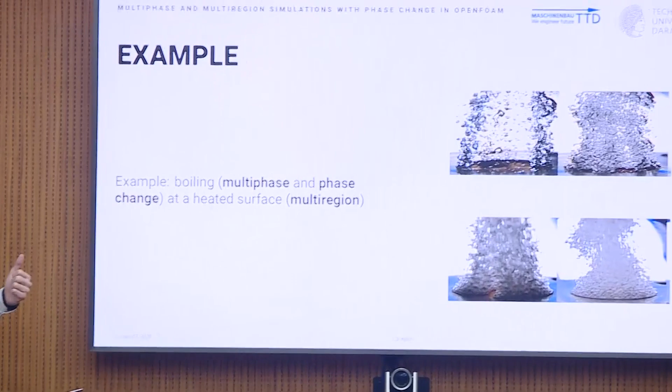You've seen it all. The boiling process is the perfect example: it's multi-phase, vapor, multi-region, solid and the fluid above, and we have the phase change between liquid and vapor. And the challenge is, of course, how to model it.

I am not in the position to give a general overview of all methods. I will rather try to give you an overview based on my PhD work in the last 4 years, which is close to this experiment which has just been presented. I will try, as I said, to locate the methods among the possibilities, and hope that you can see some universal methodologies.

If you are looking for general overviews, there are excellent textbooks and very good reviews. A textbook example is from Grétar Tryggvason, who was here 2 weeks ago. And there is a company, I don't know them, but they put out high quality presentations on their website on OpenFOAM.

So feel free to check them out for a deeper and more comprehensive overview.

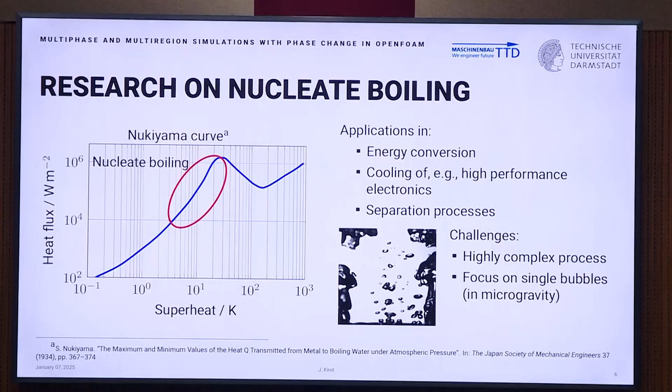That's the reason why we do experiments and numerical simulations in zero or microgravity. And then there is the interplay between the experiment and me as the numerical guy.

Axel said they challenge me, they challenge the numerical methods. I try to be strong, and in return, I can use the simulations as a magnifying glass and investigate phenomena which are not visible by experimental methods. And of course, I can do parametric studies without flying to the ISS. So the interplay between experimental work and numerical work is very important.

Okay, let's pretend we start from zero and have to choose what kind of models to choose. Each of these three categories has different tasks.

So multiphase needs to tell us where the interface is. We reconstruct it so that we know the shape of our bubbles or droplets which we are simulating, and it has to advect this interface in our simulation. How does it move with the velocity or phase change?

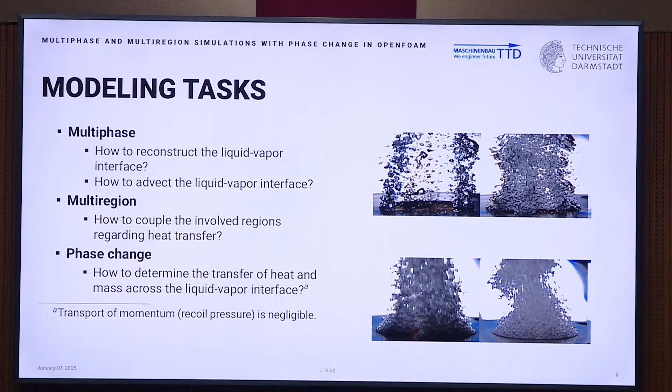Multi-region, in our cases, we don't have large forces and no mass transfer, so multi-region reduces to conjugate heat transfer between the solid and fluid. And finally, phase change: how do we calculate evaporation and condensation?

I want to stress that multiphase, multi-region, phase change sits in a bigger picture, of course. We are inside CFD simulations. Above today's talk, there are choices to make, like whether to use the lattice Boltzmann method, or how about turbulence, even discretization schemes. And below today's level is the stuff Professor Stephan has presented: what do we do really close to the contact line? So we are in the middle of the pattern.

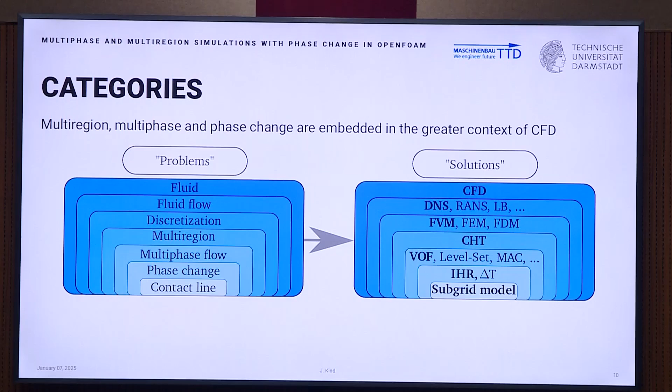A Lagrangian approach produces either a moving mesh, which deforms with the interface, or the front tracking method, which introduces small massless particles. These particles are moved, they experience force from the flow, and they tell us where the interface is.

In contrast, in the Eulerian approach, people introduce scalar quantities, and these scalar quantities are transported through the domain. To my knowledge, in my field of research, simulation of bubble growth, it is rather uncommon to have Lagrangian type; many people use the Eulerian type interface.

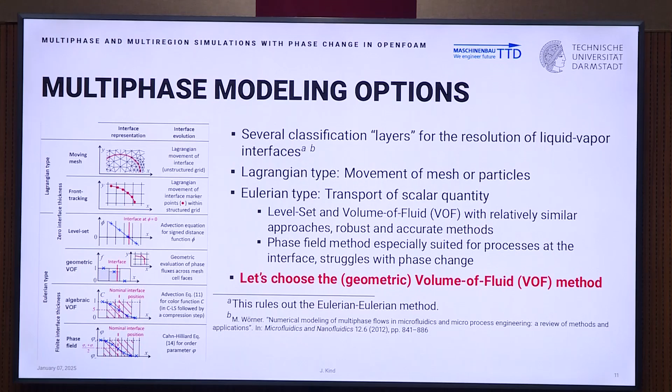Starting with the phase field method, I had a discussion with Arvind. It's very well suited for interface chemistry and has nice surface tension implementations, but it has problems with phase change.

In contrast, the level set and volume of fluid methods are more used for phase change phenomena and are relatively similar. We had the talk of Professor Sharma yesterday, who showed us this level set function. The volume of fluid method is slightly different, and he mentioned that the level set function always has the problem with mass - you have to ensure mass is not getting lost. The volume of fluid method doesn't have that problem. I'll show why in a second.

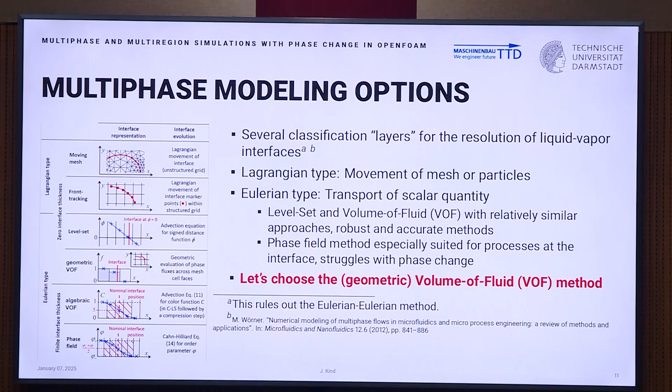Therefore, let's choose the volume of fluid method for further simulation, and in particular, let's choose the geometric VOF method. I will explain the difference between algebraic and geometric VOF.

Multi-region modeling, or conjugate heat transfer, always is based on the Dirichlet boundary condition for temperature equality at the region, at the patch where both regions meet, and heat flux equality - this is the Neumann condition.

However, if you want to implement these two conditions in your simulation, you have lots of options. Usually people use Dirichlet in the fluid, Neumann in the solid, or vice versa, or Robin Neumann - really lots of different combinations.

To my knowledge, the most advanced coupling method is the Robin type of boundary condition. Therefore, we choose it, and I will explain it.

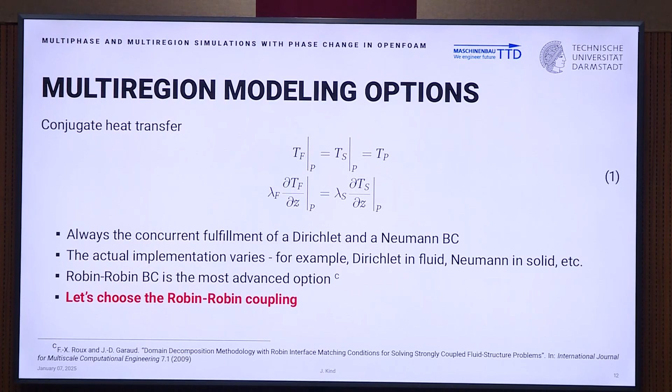Finally, phase change modeling. There are two approaches to phase change modeling. Either we sit on the interface and look at the interface normal vector and try to calculate the temperature gradient towards the interface. From this gradient, we get the heat flux, and this heat flux we assume is the phase change flux crossing the interface.

This method is very robust and relatively parameter-free. So it's really a good method.

The other approach is assigning the interface a heat resistance. Then you only need the temperature in each interface cell, compare it to the saturation temperature, and divide it by the heat resistance to get your heat flux. This method is okay, robust, but everyone who has ever used it will know there is one factor in it which is free from 0 to 1, and it's your task to determine this factor.

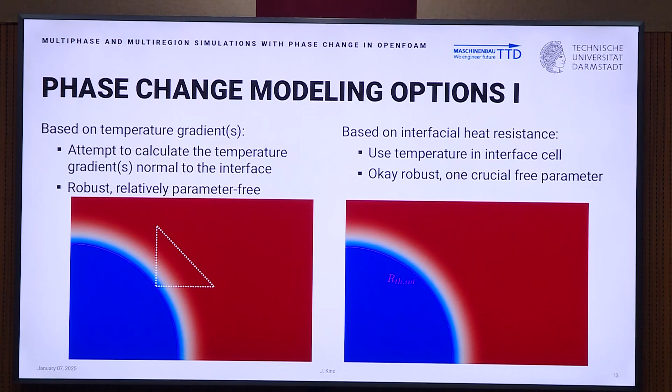So based on this information, we should choose the gradient-based models because they are, for this configuration, superior. This changes the closer we get to a region boundary, the closer we get to the solid.

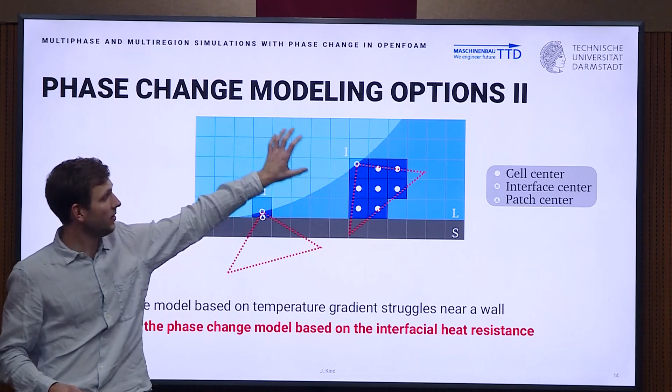So case 1, for example, for a vapor bubble in a liquid, we are sitting on the interface looking for other values, and there are enough values for calculation, so there is an accurate calculation of the temperature gradient.

The closer we get to the contact line, the less values are present for the gradient calculation - only this patch value, and this patch value doesn't reflect how much heat is transferred in this region. This is a problem because we've heard a significant share of heat transfer occurs in this region during vapor bubble growth, boiling.

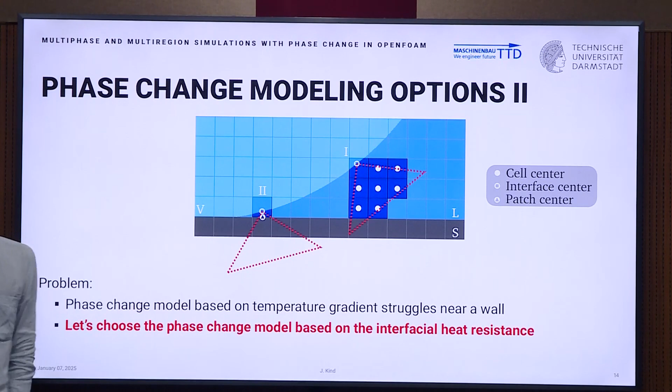And when I did developments on conjugate heat transfer in this region, I noticed that even though I enhance the coupling properties and bring more heat flux, nothing changes, because this gradient-based model doesn't pick up how much heat is in this region.

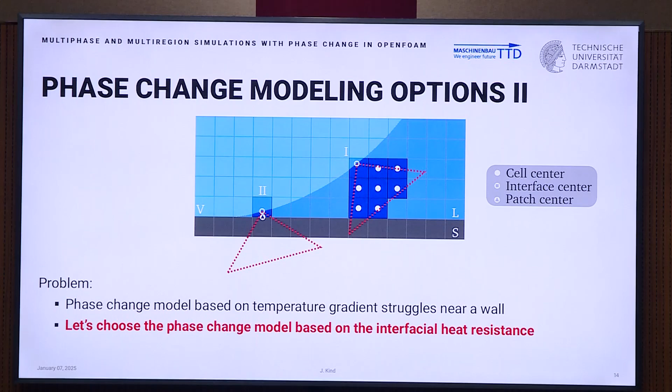And therefore, with one crying eye, because it's not the best method, we choose the method based on the interfacial heat resistance.

The volume of fluid method, which we have chosen, is based on the finite volume method at the upper level, and it introduces a variable called volume fraction. This volume fraction compares how much liquid is in a cell compared to its cell volume.

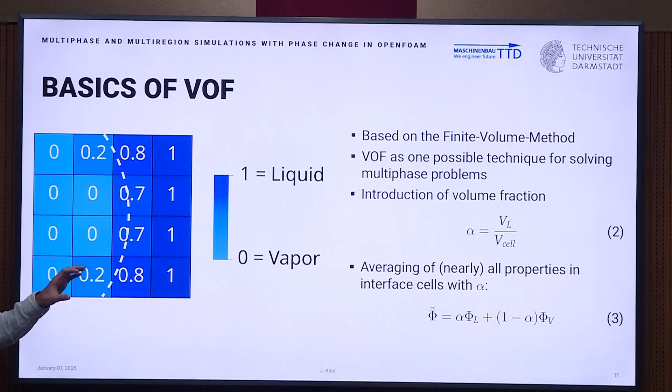For example, the model has an arbitrary interface, the dashed white line. The cell would have different fractions of liquid, one meaning full liquid and 0 meaning vapor. The advantage is that all liquid and vapor properties in these interface cells are now averaged with this volume fraction, and then we can still use the one-field formulation from single phase.

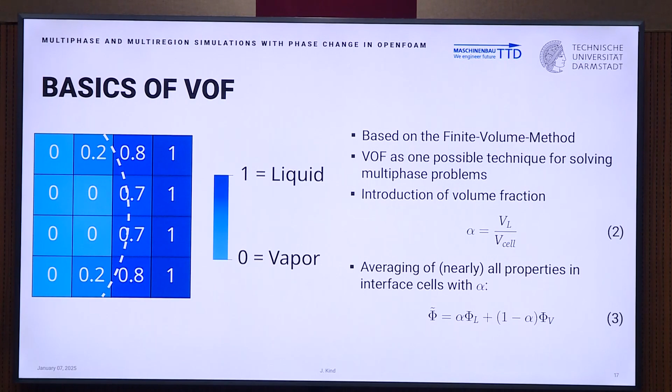And as I've already said, we need to construct the interface, which gives us the interface normal vector, very important for surface tension and contact angle modeling, and surface area, which I need to calculate the phase change heat flux arising from phase change, and advection due to velocity or phase change.

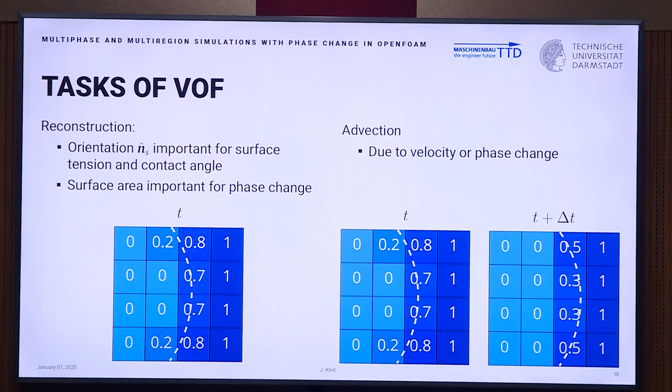For the reconstruction, there are two approaches. The first one is using iso-surfaces of the volume fraction. It's either common to use 0.5 as an iso value, or more advanced, use a variable value for this iso value.

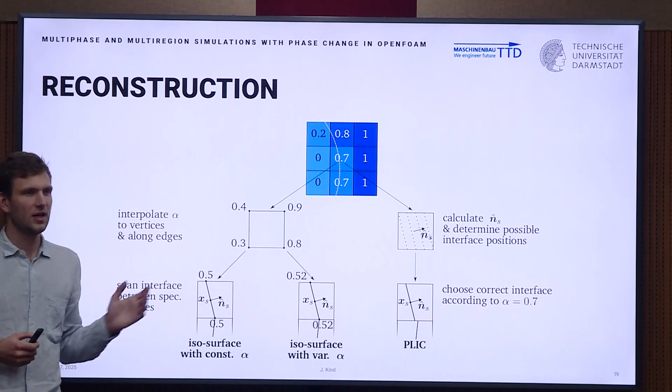And the alternative is piecewise linear interface construction, where it's an iterative process, but highly simplified. We determine the interface vector n, and from this vector we know all possible interface alignments in our set, and then based on the alpha value, based on the volume fraction, we choose the correct one.

And here is a comparison between the methods. Let me start with the right-hand side. This compares the error over the resolution of the mesh. A good method has a strong convergence with finer resolution, because the finer you go, the better it should be. And second order means it goes with the square of the cell size.

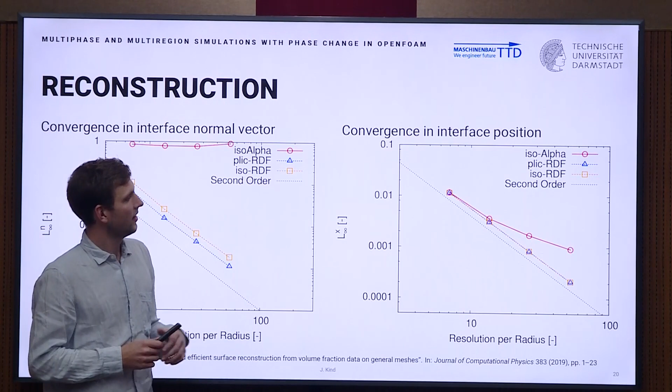And we see that iso-alpha, which is the approach based on the iso-surface, deviates from the straight line, and it doesn't even converge, which tells us this is not a very good method. There are two other methods, both PLIC-based or iso-based, and they have an RDF in the back, which I will explain in a second. We see that they are much better, with a small difference in the normal vector interface, so we state that the PLIC-RDF method is the most accurate one right now.

But what is this RDF? Usually, the interface normal vector is calculated based on the gradients of the volume fraction.

But with today's volume fraction methods, especially for the advection which is coming in a second, we see we have a very sharp transition from alpha 1 to alpha 0, just one cell, which means the gradient of this field is not so reliable. The approach is the introduction of a signed distance function, very similar to the level set function, and this function is distributed in a much wider range around the interface. So if we take the gradient of this function, the gradient calculation is much more reliable.

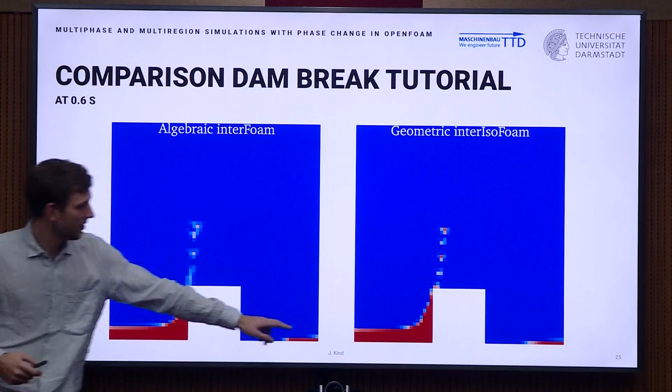For the demonstration of this higher accuracy, this is the dam break tutorial, which we've also seen yesterday. We have a liquid in gravity which is initially shaped, with an obstacle in the middle, and if we run the simulation, the liquid will fall and splash over this obstacle. I hope you can see that in the geometric VOF method we have a much sharper interface, for example also around here. Here we have a diffuse interface over several cells; here we just have one interface. So this is just a graphic demonstration of the superiority of the geometric VOF method.

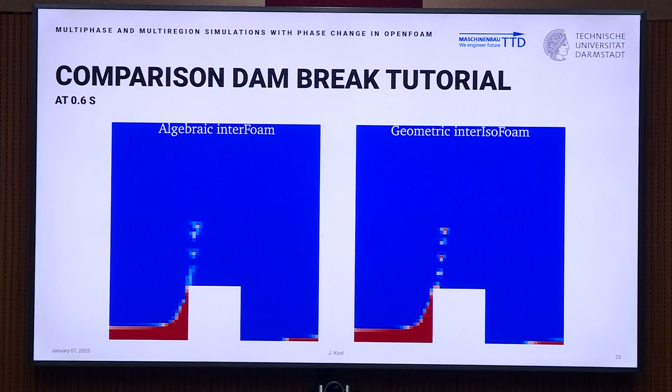Surface tension modeling we do with the continuum surface force method. It's arguably not the best and most advanced one, but it is reliable and has been used in lots of studies. You see now the importance of the interface normal vector, because we need a gradient of it for the calculation of the curvature.

Taking the gradient of a field which is inaccurate brings more error than taking the gradient of a field which is more accurate. This is a topic not so well researched and documented.

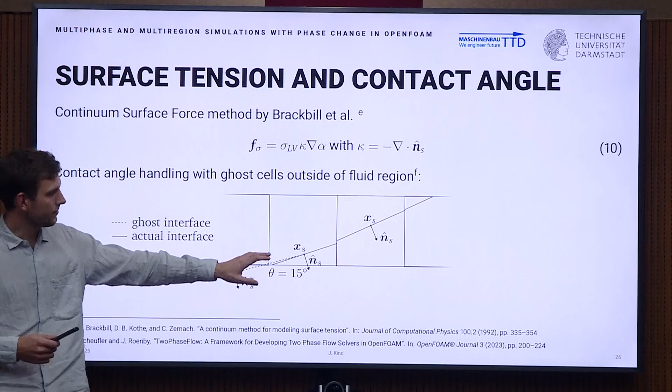How do we model the contact angles at the wall? Some people set the interface normal vector in the contact line cell with brute force to the prescribed contact angle. It works, but who knows how physical it is.

This approach from Scheufler uses values outside of the region, and this introduces a gradient in the interface normal vector. If the interface does not align with the prescribed contact angle, you get a gradient in the interface normal vector, then curvature, then the surface tension force, and this pushes the interface into the right direction. But there's still work to do, and if you're interested in numerical work, I think this is a good topic.

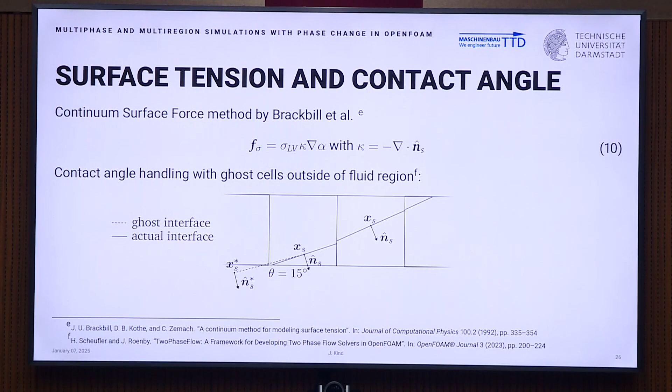For the final measure, we started with one equation for temperature or energy, and we split this into the liquid and the vapor temperature. This has several positive effects: we completely decouple both liquid and vapor temperature, and they may only talk to each other if we allow it. There's no unphysical heat diffusion, and therefore we also have more control of phase change and conjugate heat transfer, and there is higher stability.

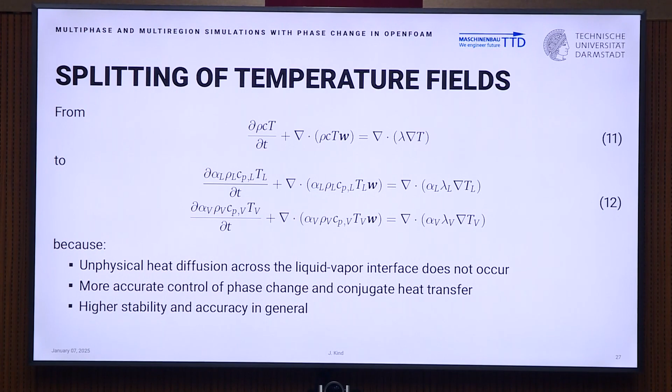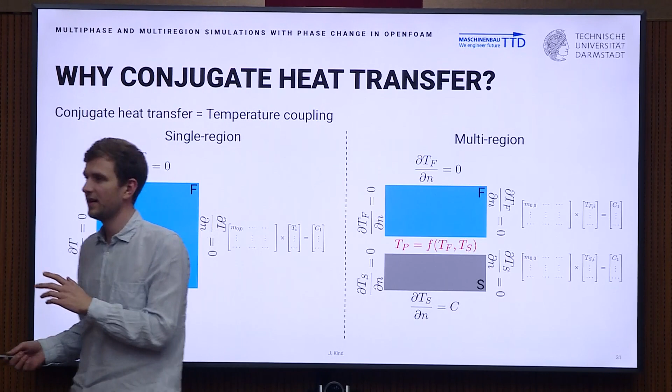Coming to multi-region modeling, why do we need it at all? In multi-region problems, we have separate equation systems for our regions, so a separate equation system for fluid and solid. At the outer boundaries of these regions we have our usual boundary conditions, fixed value or whatever you like. At the coupled patch between two regions, the boundary condition has to depend on both regions. This is what conjugate heat transfer does.

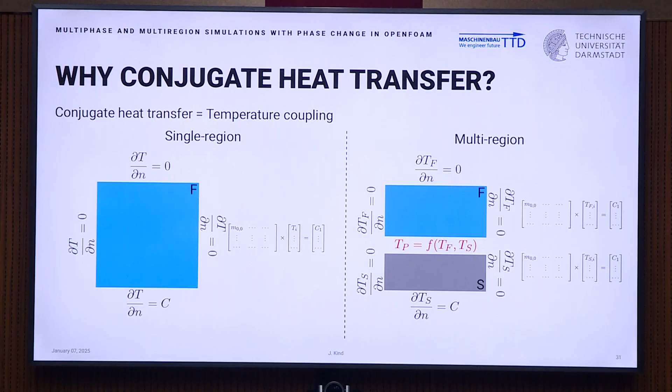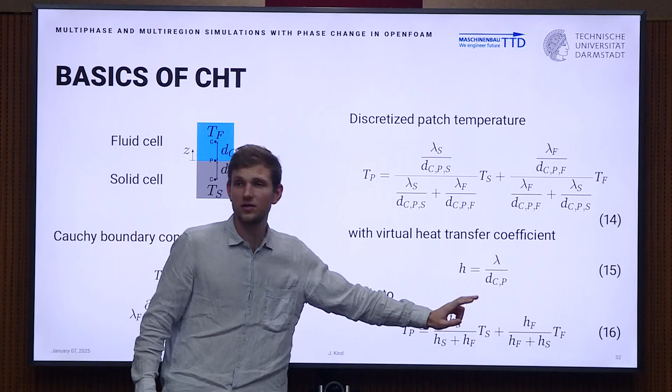Here's the equation you've seen already: temperature equality, heat flux equality. If we discretize this equation and introduce a virtual heat transfer coefficient, we end up at this relatively simple equation. So the patch temperature, the boundary condition for both regions, is somehow a weighted average between solid and fluid temperature, and the weighting is given by these virtual heat transfer coefficients.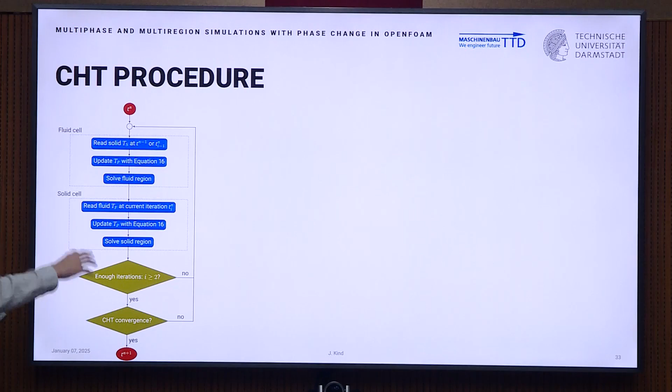Same with the solid region: we ask the fluid what its temperature is, calculate the boundary condition, then solve it. As I said, this fluid solution is based on an old value of the solid, so it makes sense to repeat this process at least once before we begin checking for convergence in temperature between the regions.

Now a short intro to the topic Axel has already introduced.

When I started working with conjugate heat transfer and understanding the equations behind it, I noticed that this usual averaging of properties in the interface cells at the wall is not correct for most cases, especially for my bubble growth case.

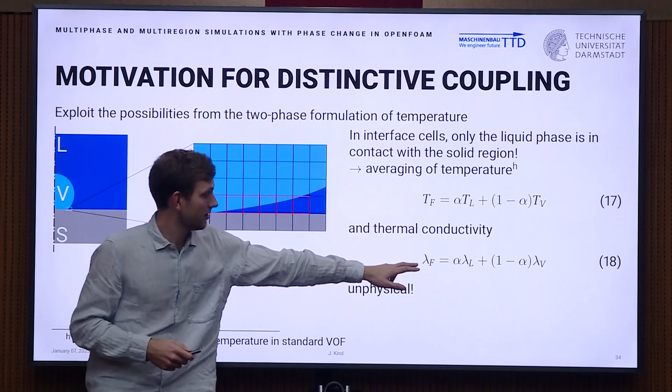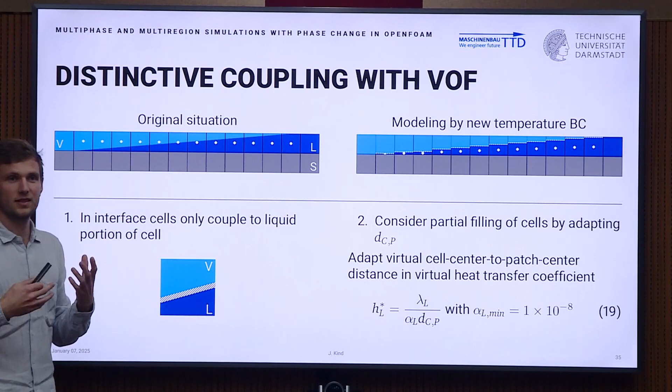Why should the vapor take part in the coupling? It doesn't touch the solid, only the liquid in contact, except for the contact line maybe, but that's another story. So this averaging of properties, especially thermal conductivity, which brings down the effective thermal conductivity in these cells, is unphysical. What we need to do is exclude the vapor from the coupling in these interface cells. With the volume fraction, we have the information on how much liquid is in each interface cell.

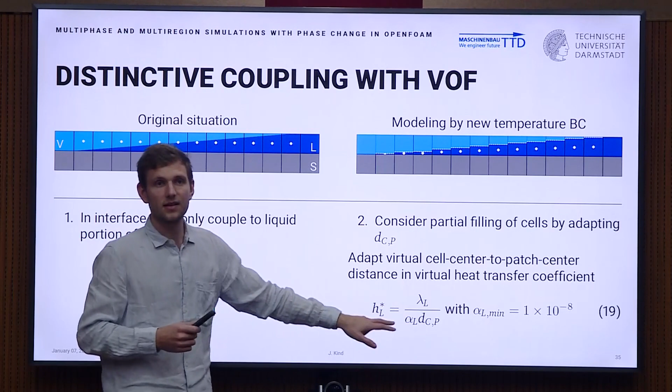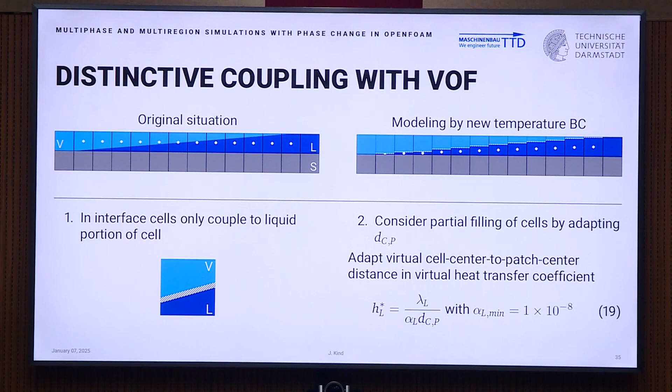With this information, we adapt the virtual heat transfer coefficient, which brings physicality into it, because we now really couple the solid cell with the portion of liquid which is the problem.

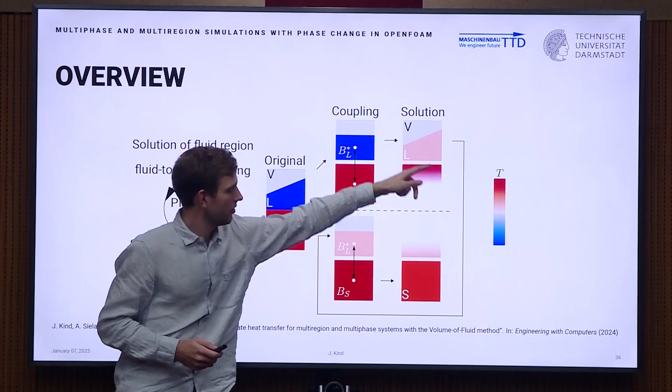This is an exemplary scheme. As I've said, we only couple liquid and solid, solve it, go to the solid, couple both, solve the solid, and repeat this process until convergence.

On the one hand, this introduction of the volume fraction in the denominator massively enhances the virtual heat transfer coefficient for small volume fractions. That enhancement is roughly 1 over alpha. But, as always in CFD and science, there is no free lunch.

This massive enhancement leads to a tightened stability criterion. I will introduce this stability criterion in the second part today, again with alpha squared. So you have to be careful, you don't get it for free.

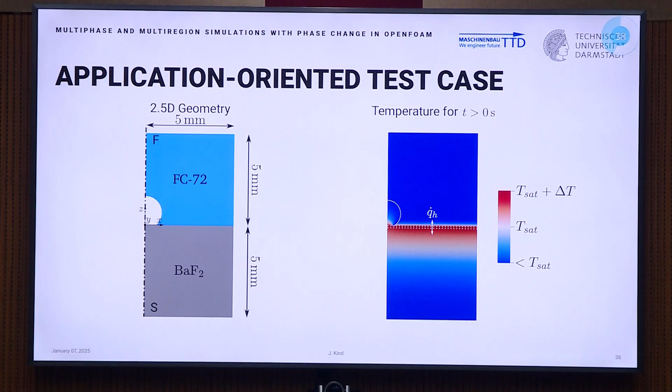We have countermeasures against it which work really well. I won't go into it, I just want to show the graph as I've already shown.

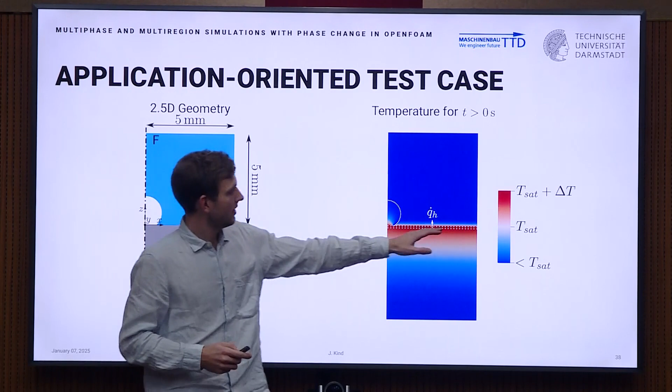If I use a setup very similar to this experiment, where I have a heated solid and a vapor bubble, I can compare this averaging approach with the average substance and my new distinctive approach. Have a look at the red and brown curve, where we see radius over time. The brown curve is the standard volume of fluid method with the average property.

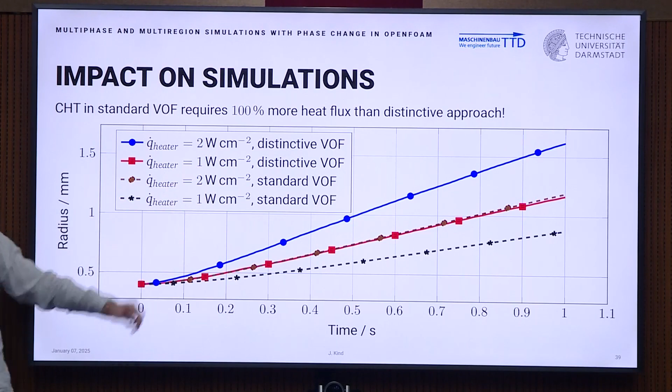For this bubble growth, the averaging approach needs 2 watts per square centimeter. The red curve is the new approach, and it just requires 1 watt per square centimeter. So in return, you can say this averaging approach needs 100% more heat flux to reach the same results as the more physical

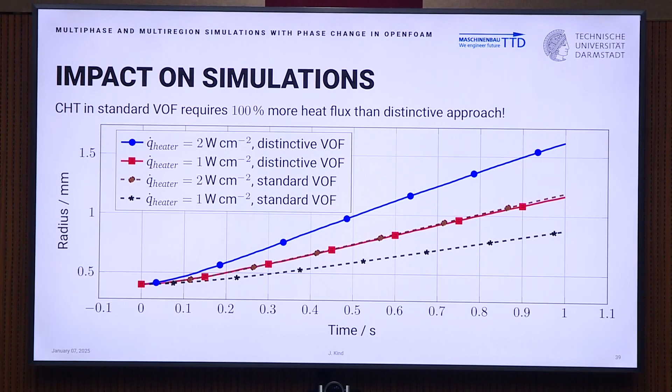approach, which tells us how wrong this averaging is for simulations of volume.

I did lots of work on this in my PhD. I have a repository on it, and if it sounds like something you are interested in, please mail me, and you can work with it, and we can collaborate. There is also a paper.

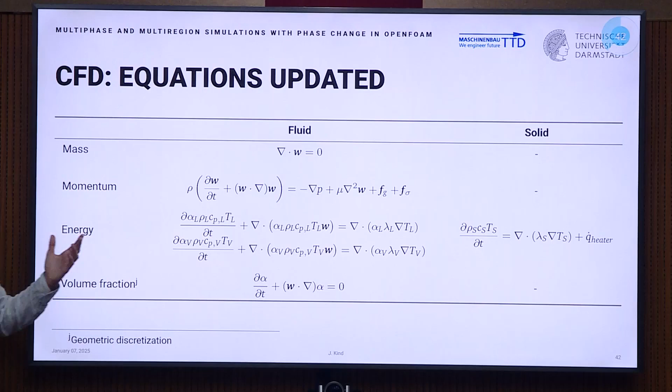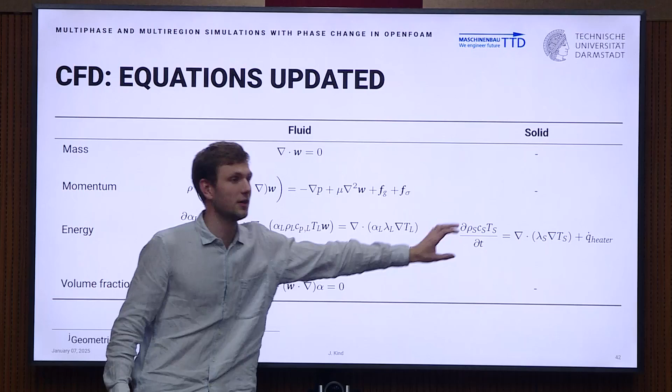Okay, what has changed for the multiphase conservation equations by the multi-region introduction? We have a new conservation equation for solid. I think I didn't show it at all, sorry. And the boundary condition for this equation and for these equations are set by the new coupling.

Okay, last method, which is phase change. I want to start with stressing the phase change. We usually think about heat and mass transfer. Because we have this volume fraction value, we also have to take care of volume fraction.

And you really have to do it manually. It's not like you add, for example, the heat flux to your energy equation, and then everything else happens automatically. In contrast, you have to make sure that in every equation which is concerned, the correct phase change term is implemented - heat fluxes in the energy equation, volume fraction in the volume fraction equation, and volumetric mass in the mass equations.

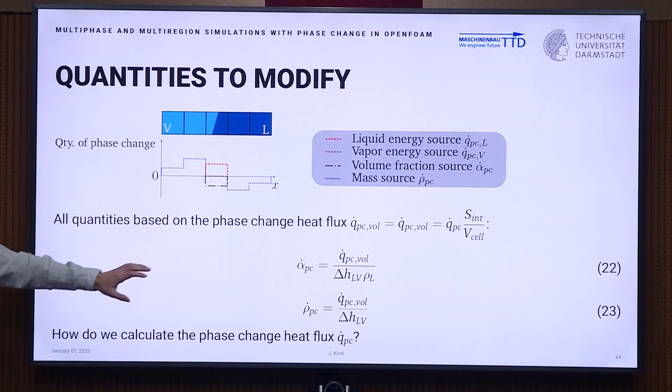As you can see here, we need the interface area, which is coming from the enhanced reconstruction algorithm. And all equations are starting with the phase change heat flux.

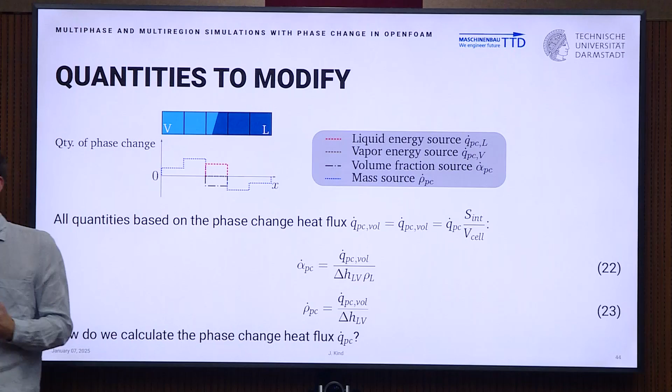So the question is, how do we get the phase change heat flux? We have decided to use the interface model, based on work by Schrage, Hertz, Knudsen. Therefore I named it the Hertz-Knudsen-Schrage model.

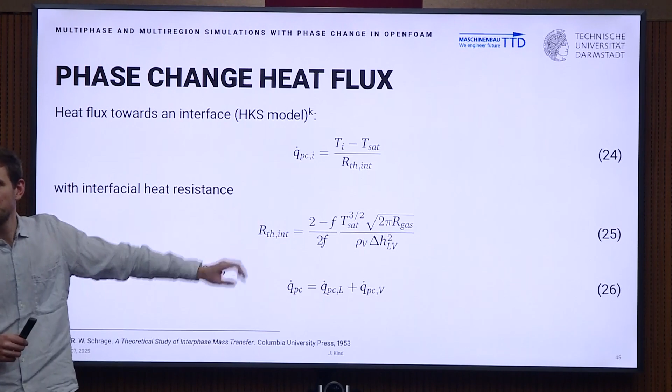It's simple: use the temperature in your cell, compare it to the saturation temperature, and take care of the intensity, which is calculated by this term. There we have this F, the accommodation coefficient or incorporation coefficient.

And there's still ongoing debate, work on how to determine a suitable value. Many people use 0.5. You could try to start with this and then analyze.

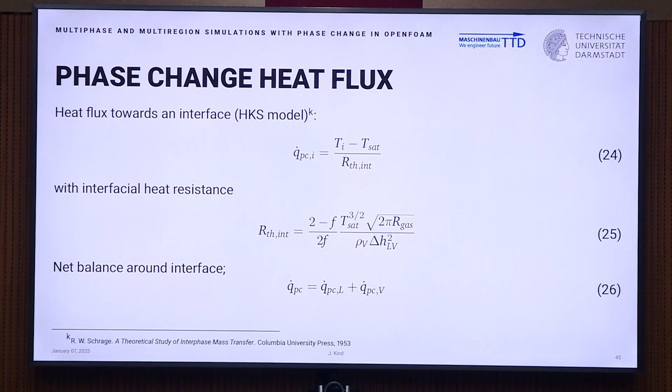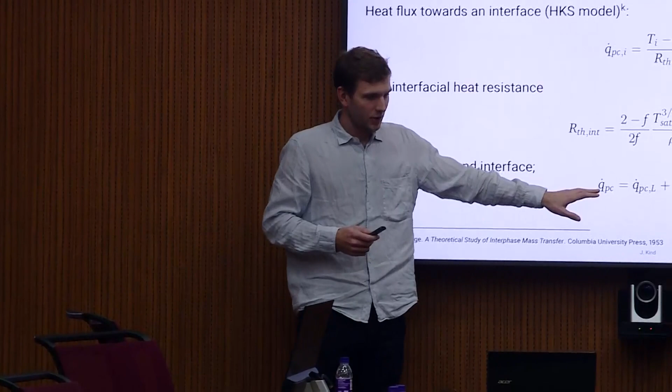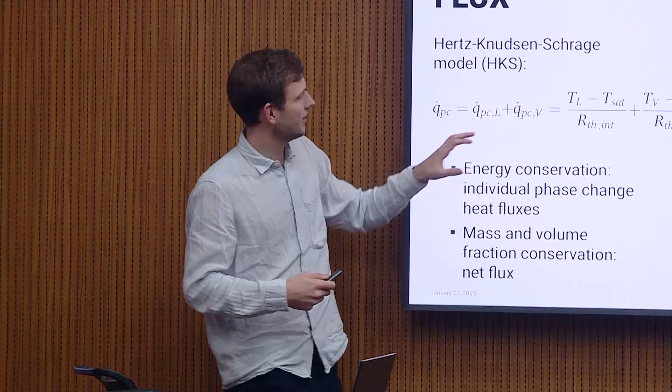The interesting thing is we have two energy equations. So we have two phase change heat fluxes, and they add up to the net phase change heat flux. To me, I needed some time to really understand this very simple equation, but I hope with this figure, it's straightforward. So as soon as either the liquid or the vapor are hotter than the saturation temperature, there is more evaporation.

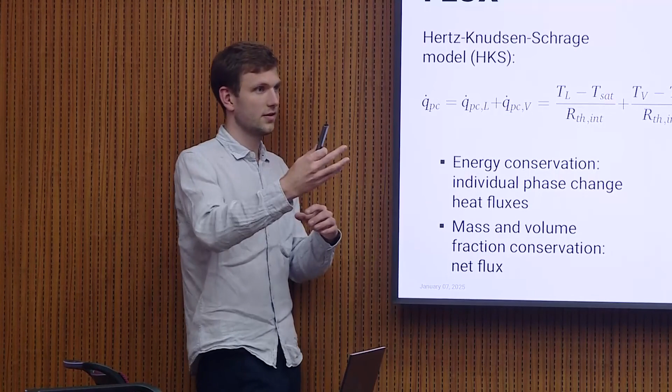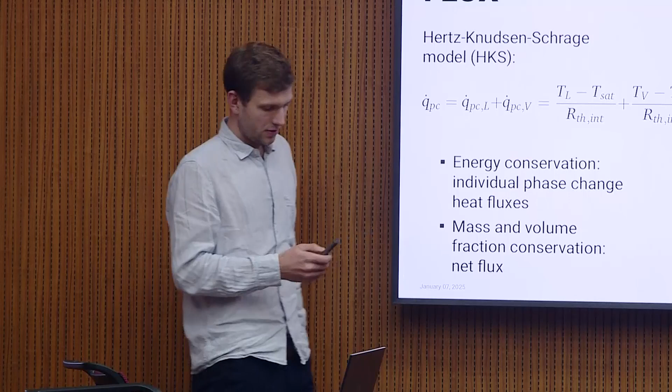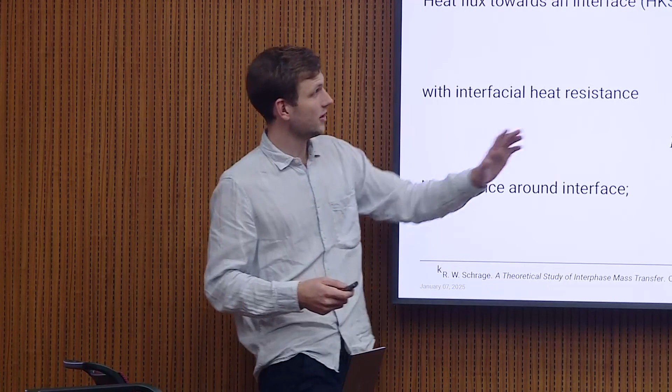And in my opinion, this is a flaw of this model, because there is absolutely no information in this model about any conductivity or differences between liquid and vapor. It's always just comparing temperatures over the same heat loop.

Yeah, only temperatures and the same heat loop. And to me, this feels dangerous. This is a point where this gradient-based model has an advantage. So if you have problems in a bulk liquid away from the solid, I would recommend using the gradient-based model. But as most of us are using boiling, there is work to do.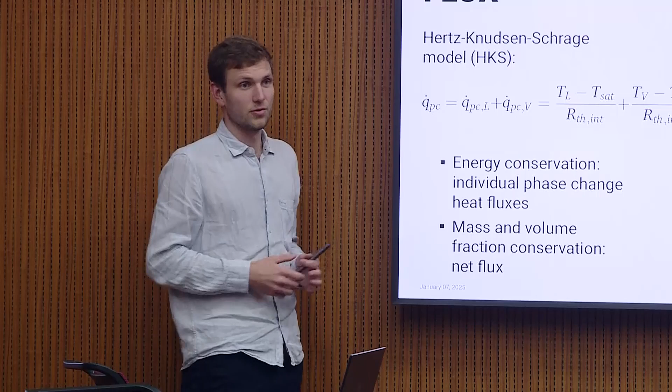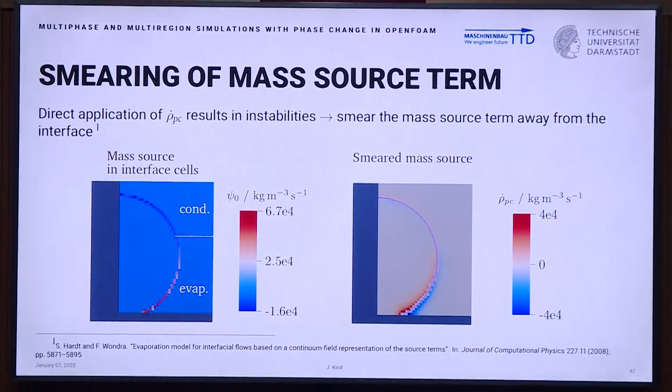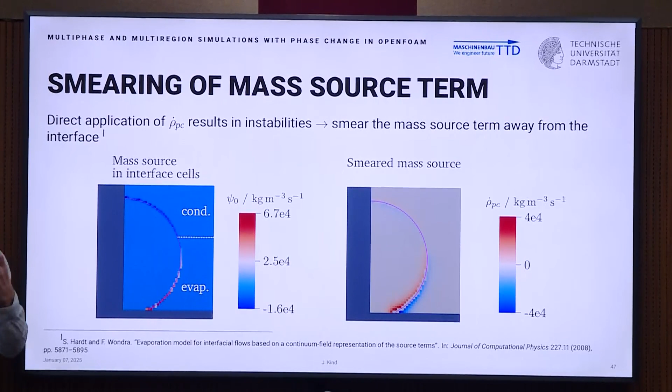In the beginning, I talked about phase change heat flux, and its application in the volume fraction equation and the mass conservation equation. Especially in the mass conservation equation, if the phase change mass flux or flow is applied in the interface cells, the numerical solver gets problems because it's the Poisson equation, the pressure loop, and we usually encounter stability problems.

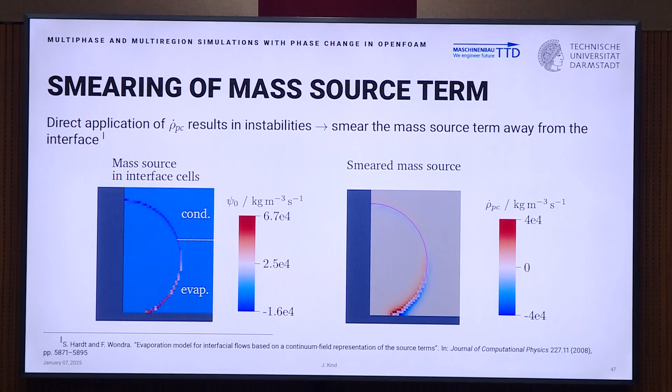The solution is removing the phase change terms from the interface cell and spreading them to cells which have full liquid or full vapor. This is the Hardt-Wondra model, also developed here, and this really helps with stability.

Okay, for the final time, let's do the computation. This is the multiphase equation. We have a phase change, so a new term in mass conservation, but no term in momentum.

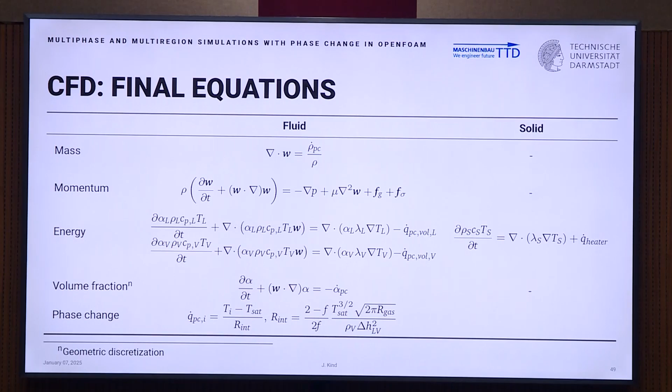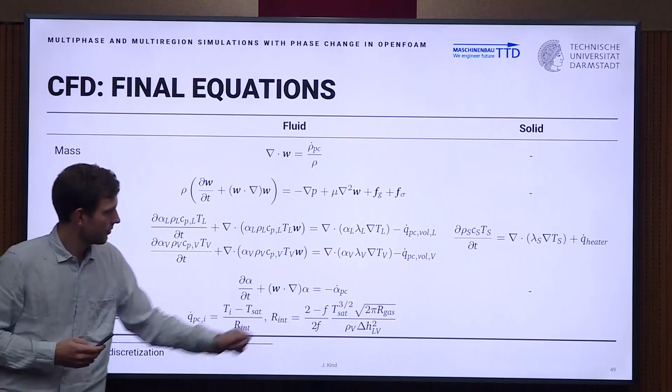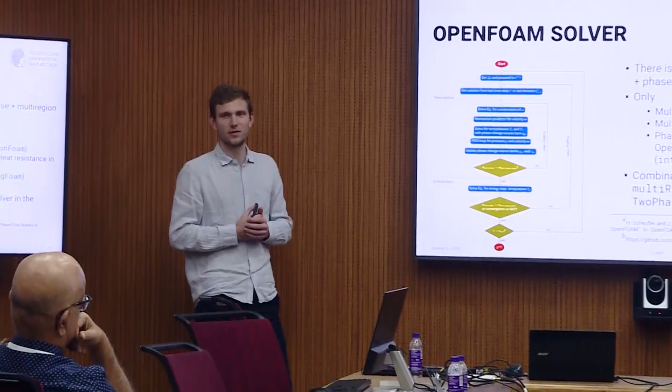The funny thing now is there is no official OpenFOAM solver which can do multiphase, multi-region phase change. We only have particular solvers which can do just these challenges.

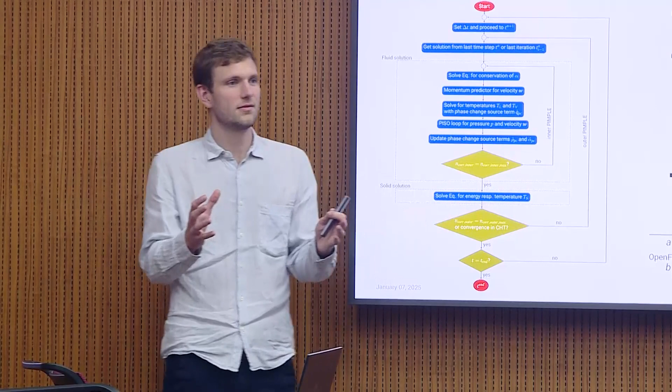And luckily for me, for us, there is the two-phase flow library where Henning Scheufler has brought together these modules in a high-quality OpenFOAM coding.

And this library has lots of knowledge from our institute. For example, the phase change models, so they carry the history of how this developed.

Conclusion: I hope you have an idea of how to model multiphase phase change. They are powerful and are used a lot, but you have to know the limitations.

I think that the fact that no official code, even in commercial code to my knowledge, there is no software which can do all these things, but no one dares to make this topic official. And it's common that these codes remain scientific.

But the more people work on it and bring it forward, the more chance we have for it. And I hope to leave this impression of OpenFOAM.

It's a great base. In the next talk I will do a hands-on, show a little bit, maybe you're interested, how you can really develop, dig in as deep as you want, in contrast to commercial code, to bring forward.

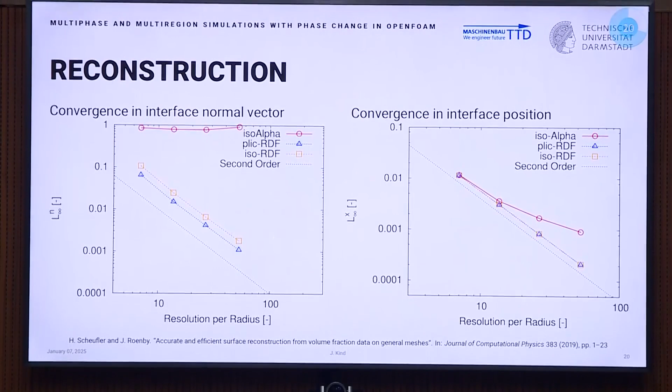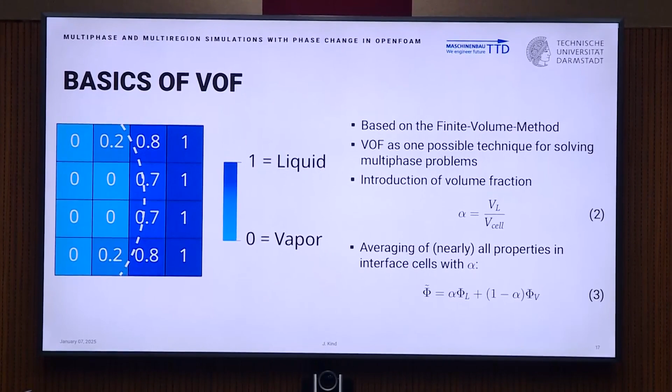This equation... this direction? No. Volume of fluid basics first, yeah, this one. So how is this equation calculated? How is the volume of the liquid compared with volume of the cell? I hope to answer it in your way. It's not calculated in that sense, it's tracking.

It's a variable, alpha, like temperature, which is introduced in the system, and by reconstruction and advection, alpha is modeled and solved for. So you start with some initial position of the interface, and from there it is advected. Wherever you have pure liquid, it is 1, or pure gas or vapor, it is 0, and you know the exact location of the interface to start with. Then it is advected depending on the velocity and effective fluxes, so you don't need to every time check what is the volume of the liquid occupying the cell. Just the interface is moving around based on advection flux, and the solver gives you the alpha, and you can calculate the liquid volume itself.

So will this OpenFOAM software be extended to high pressure applications like 100 bar, 120 bar? It is capable of this. What's special in high pressure? Like in a nuclear reactor, we use around 100 bar, 120 bar for that simulation, so this OpenFOAM software would be applicable there for the simulation.

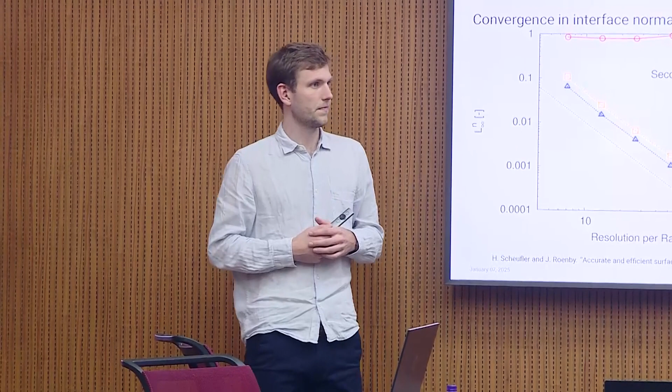No, it's not my work, this presentation. It's from the creator of the solver. In this paper you will find the comparison, and on structured meshes it's very close to the height function.

Height function is one more way. So my second question is, is there any reason why you used RDF specifically, the reconstructed distance function, instead of what, instead of height functions let's say? I don't have... the RDF is a new field in the solver, I don't have the height function in OpenFOAM. You can calculate it, it's similar to the reconstructed distance function as far as I'm informed. Probably your question is why not use a distance function and make it a CLSVOF, right?

Because now a lot of development is happening, I think recently there are some papers which talked about height functions on unstructured grids also.